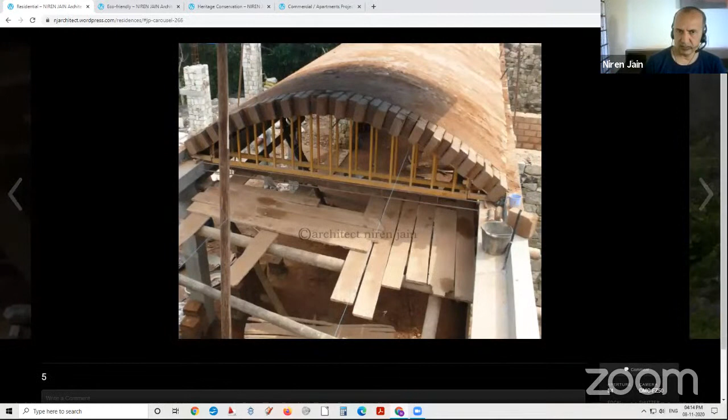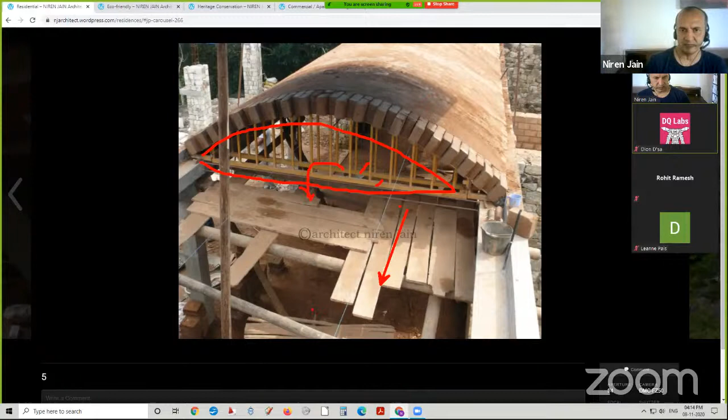So this is how we had to build the vault. There is a steel template. It's not a complete formwork or a centering like you see for the slab. You just need these two steel members, and you basically slide them this way. So as you finish this construction, you move. You can see two steel templates. So once this is done, you move that one to the front, and you just slide that template along this thread, which is a guiding line. And you have an L-shaped beam on the side, and that's how it is done.

I also consulted Dr. Yoganand from RINMAI. They're doing amazing work on alternative technologies. So they have helped me in realizing some of the structural details for this project.

That's the other part. I just have to move this around, sorry. So for the staircase, we used a Kota stone, but what is available in the market is a polished stone. So we just flipped it around and used the rough side, which is perfect for a non-slippery staircase. So simple details like that, in how we adopt it.

The clients wanted to name their house the Hornbill House because there are a lot of hornbills coming to their estates. That's an entrance courtyard, and that's a CNC carved hornbill on the door.

That's the entrance car porch, of which I showed you a night view in the earlier photo. So the vault is there, and then you have a tiled roof above. In Bangalore you might not need a tiled roof protection. You just need a thin layer of waterproofing. But if we did that here in Mangalore, it will not work. So we had to give that additional protection of the Mangalore tiled roofing.

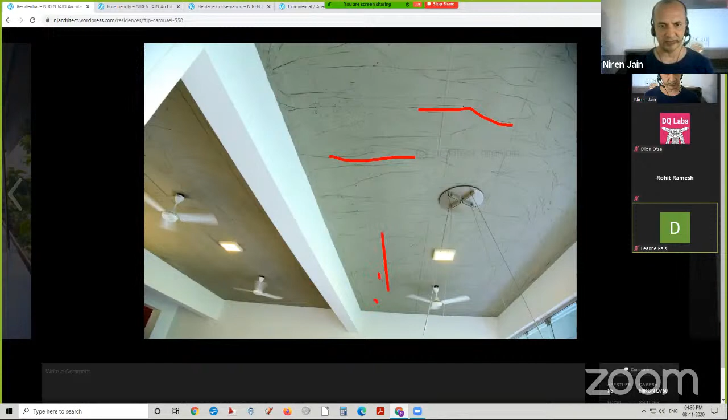So we decided to leave the slab roof. Basically, it is an unplastered ceiling. The wrinkles that you see here are because we use a polythene sheet, so that when they're casting the concrete and use a vibrator, between the joints of the formwork a lot of cement drips, and we lose a lot of cement in the process. So that's a standard practice, everybody uses a polythene sheet. So we consciously decided that we want to leave this effect.

In fact, there was somebody who came and asked, wow, what a ceiling, how much did you spend for it? They thought it was a completely modern kind of textured finish, which I might have spent a lot of money for. But in fact, I didn't even plaster the surface. Yeah, actually, when people ask you, do you need a false ceiling, maybe you should show them this. Yes. In fact, now I'm getting a lot of clients who don't like false ceilings and they see a sense in what I do.

Lucky, I mean, that's what it is. So once you believe in what it is and you follow it, and you develop a lot of details that make the style you want work well, then after seeing those projects, automatically you'll get people who like such architecture, who like such style. So luckily for me, everybody coming to me has been wanting this type of architecture. So you kind of create a niche among a whole lot of other styles that are prevailing.

So a lot of people, when they come visit my house, they say, aren't you people afraid that you have such an open space? In fact, what we've done is a rolling grill that you can see here. In fact, that's a rolling shutter that you have in commercial shops. It's a see-through shutter. So that's actually a channel for the rolling grill. So it's an automated rolling grill. So the whole rolling grill folds up there and you don't even notice that there is any grill.

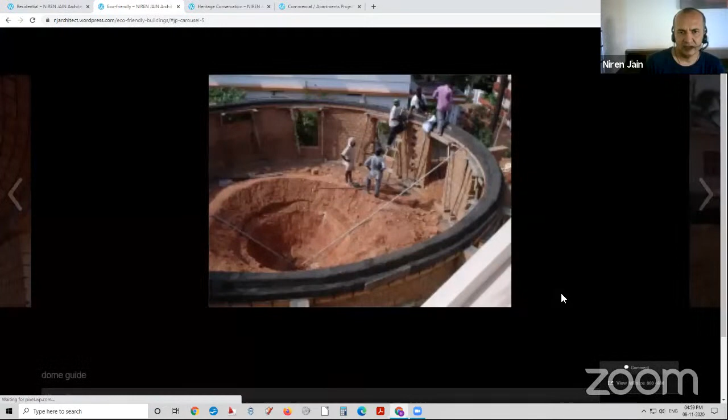So this was a very interesting project. Again, a very early project in my career. So the client came and told me that he wants a house and he doesn't want me to use any cement or steel in his building. And it had to be very, very low cost.

And this site was about 4 or 5 feet above the road level. So we basically cut all the mud, the earth from there, and we made the mud blocks at the site. And I was seeing how to basically span the whole thing without using cement and steel. So we made a full dome, a circular dome of 32 feet, which was spanning the whole house.

Which, I realized much later, is probably one of the largest stabilized mud block domes, probably in the whole country or in the whole world. Of course, there are larger domes using other materials, but more recently, using stabilized mud blocks, nobody had tried such a large dome at that point of time. Maybe there are newer ones which are larger than this.

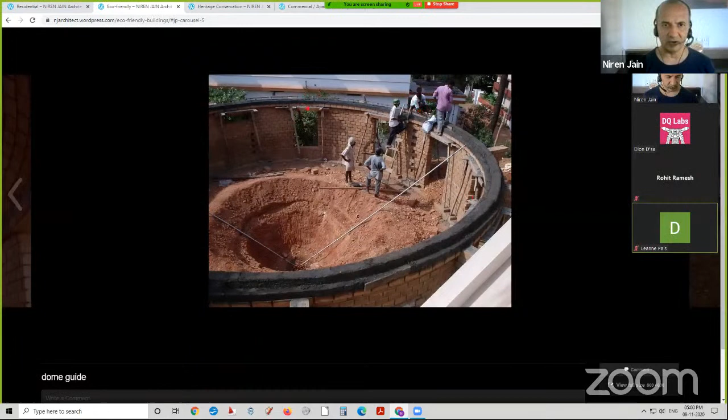It does look pretty large. Yeah, and it's an amazing effect when they were building it, and the skylight on top. So the challenge was how to achieve it totally without steel and concrete. So the thrust, when we put a dome there, this tends to go down. The whole dome basically pushes outside. So it pushes this wall outside.

So traditionally, either they had buttresses supporting them, or the wall itself was at least 1 meter or 3 feet thick, which would have been a complete waste if we did that today. So I had to convince my client that it's fine to use just a ring beam with steel, which is not really abuse. It still is sustainable because otherwise you would end up building a 3 feet wall, so I feel it is justified to use a steel ring beam so that we don't have to build a very, very thick wall. So then he got convinced.

So we put a ring beam on the 9-inch wall, and then we could put the dome on that, which was safe. So this whole 950 odd square feet, we consciously kept it circular because the maximum amount of area comes within a circle compared to any other shape like a square or a rectangle. The circle needs the least perimeter to enclose a certain area.

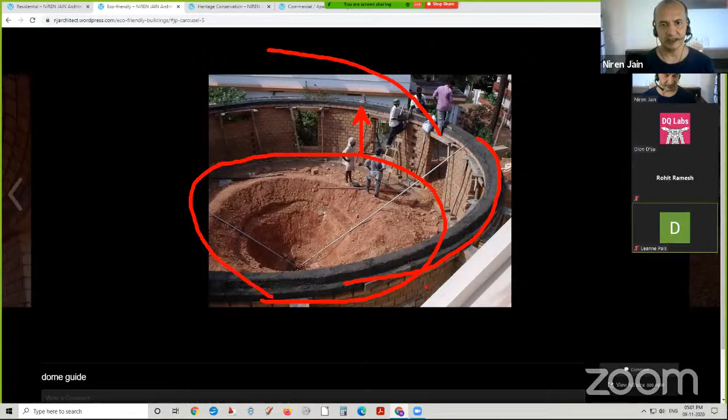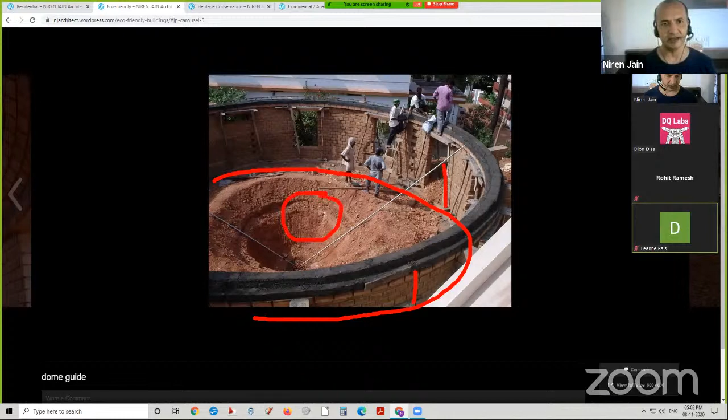So basically the perimeter means the entire quantity needed for the foundation, the quantity needed for the walls, everything is minimal for the same amount of area that you would need for some other shape. So we consciously did that. When you're doing a dome, again, there is no centering. You go on placing the bricks directly. So what you need is basically a guide of the radius of the sphere.

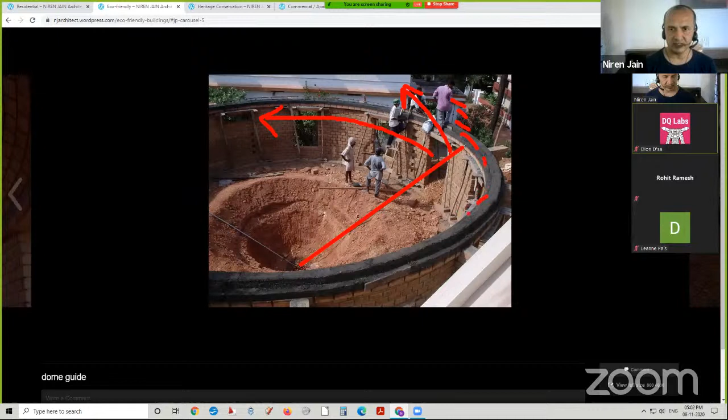So the guide had to be a little lower than the floor level. So we had to dig in deep so that this can swivel all around, and also swivel vertically and horizontally, to keep it in place. And in fact, how it works is you go on building this, and once the circle is complete, it's like you having a well.

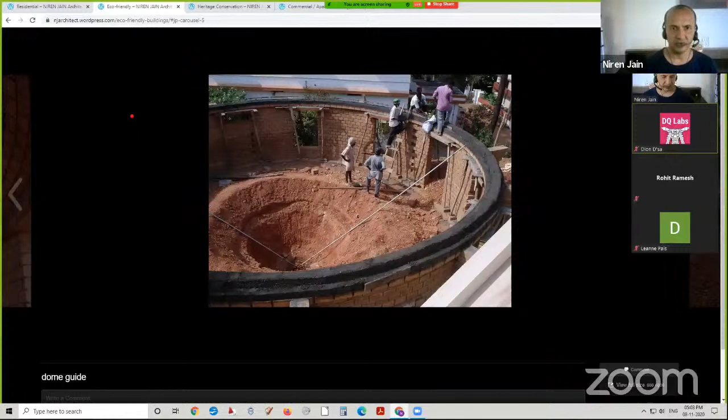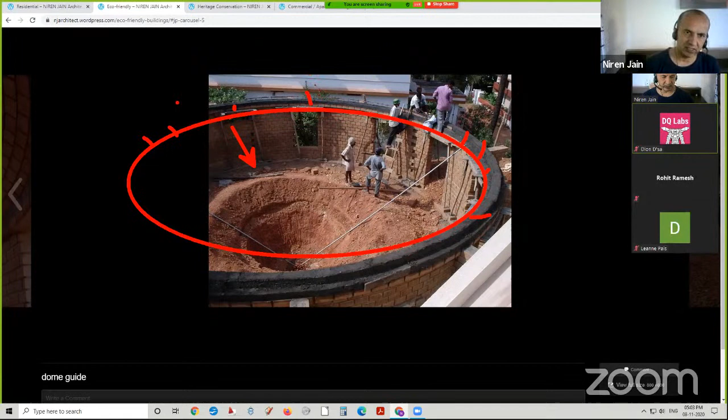So once all the bricks are laid, and it's laid at an angle like that, basically what happens is it doesn't let it fall inwards because each brick holds on to each other. As long as the brick is not crushing, it holds on to each other. So we just had to go on doing reducing concentric circles.

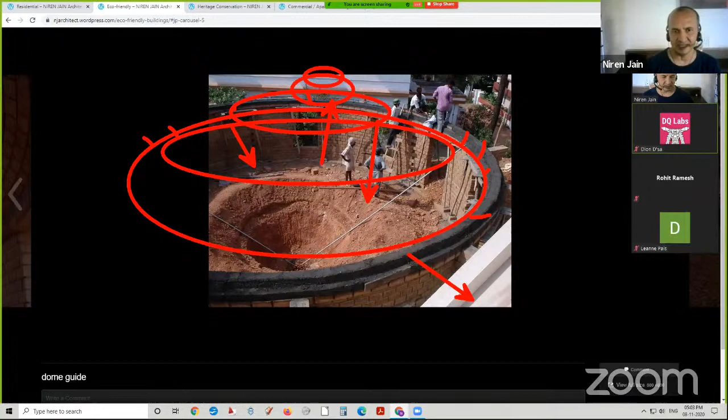So basically it wasn't allowing it to fall inwards as long as the bricks are not crushing, and this wall is not going outwards because of the thrust. As long as those two structural elements are designed, it works. Again, it was a very interesting project. Again, Dr. Yoganand from Rinmai helped us out in this. So thanks to him, without his detailing, we just couldn't have achieved this project.

I think that's about it. We can take questions if there are any.

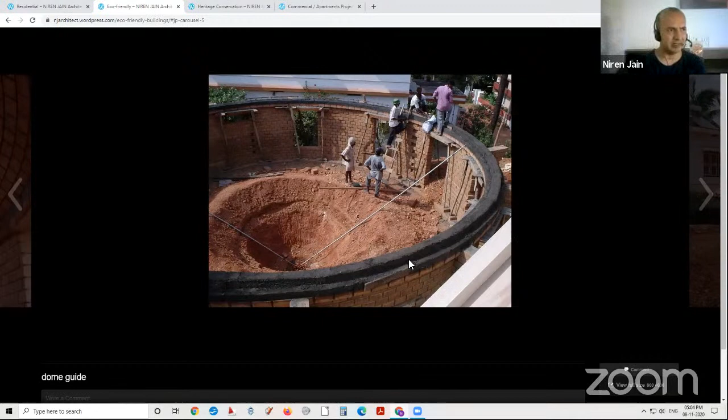This actually reminds me of the Pantheon in Italy. Right. I think that principle is similar. Same principle, yeah, very true. But that's the one which was built with buttresses, and this one has slimmer walls. And again, a stabilized mud block there. I don't know what exact material they use for the dome, but as long as it's a very hard material which doesn't crush, I think anything should work.

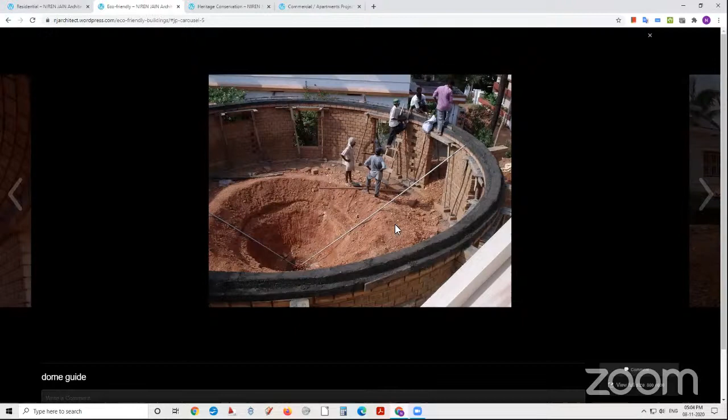It's a keystone concept. Yeah, there is no single keystone here because it's an entire circle. Keystones come in an arch, and that's one keystone. If you remove that, the whole thing collapses. Of course, even here, if there is some break in this, all these might fall. So basically all the bricks should be rigid enough. Every stone is a keystone. Yes.

Should I stop sharing screen? No, that's fine, because there are questions coming in. So a few comments and a few questions. Sangeeta Rajni is saying, lovely work, rustic, earthy, and she's a big fan of Baker's work as well. Some more comments from Nitish Kumar, who's saying, fantastic work. Sangeeta is also commending you for your work. Thank you. So Chaitanya Deshpande has some questions.

To what extent do civil engineers work on your projects? Yeah, we get all the structural details from them. A lot more time needs to be spent on detailing out. So the entire structural work is done by the civil engineering consultants, the structural consultants. And in-house, we do have quantity surveyors, site supervisors and people who do a lot of working drawings and the estimates for the project. So there is a substantial involvement of civil engineers in all our projects.